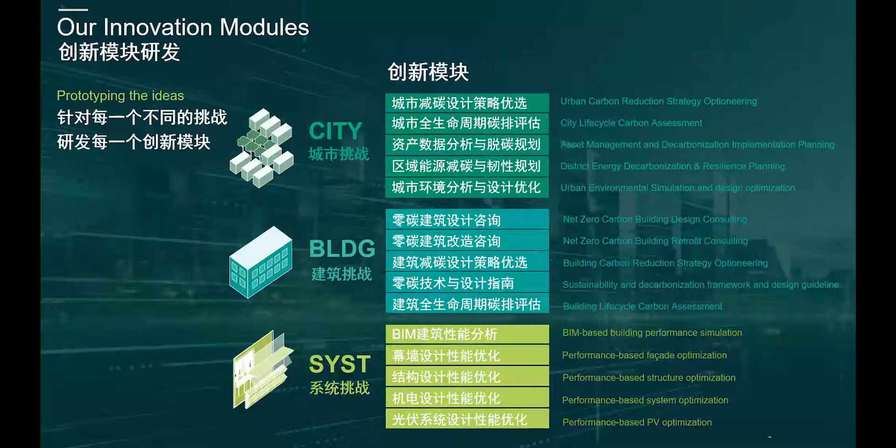So the way we work is with clients, and clients for us are internal clients, internal practices, but they're also external clients. We work through ideation and research to develop what we think will be an innovation. We test it and optimize it to see how well it will perform. And ultimately, we customize it project by project.

And this customization is really important because that's more like the design process. You don't do the exact same process for different buildings, right? You change your process, you change your result. Therefore, we think the technology layer also needs to change to adapt to be more precise. So if you buy a piece of software, it kind of gives you the same result, you just have to use it differently. We change the software by project, and that's a little bit of a different approach. And then in the center column, you'll see the iLab tags, those are all of the different modules, and there are modules within modules there that take on all of those different scales.

All right, so in section 2 here, we're going to go through some of these projects.

As I mentioned, the critical piece for us is that we're testing these on real projects to show their value. While in many cases what we're doing is relatively new, all of these workflows and technology layers I'll show are no more than 3.5 years old. They go back farther in terms of ideas, but we've really been developing them within the last 3.5 years, in some cases the last 6 months or less. But we test them out on a range of clients, scales, and asset types.

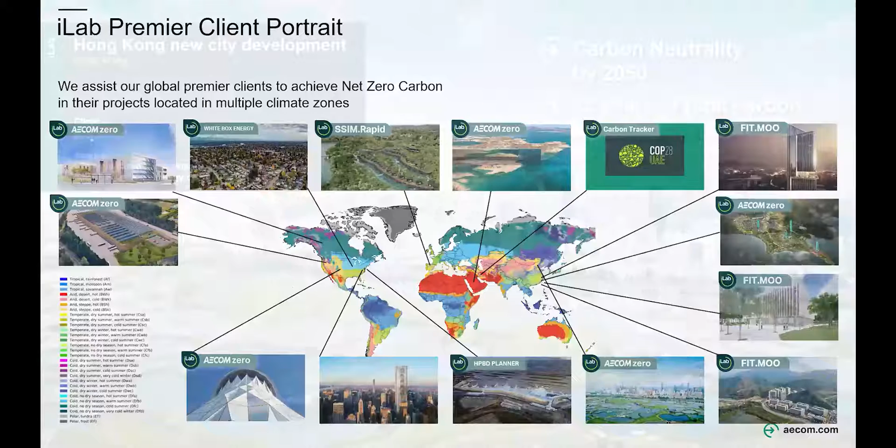So the first one, we'll start at the city scale. This is the Hong Kong new city development. What we were looking at is life cycle carbon assessment and doing a decarbonization strategy. Ultimately, they have to achieve the goals of the project to achieve carbon neutrality by 2050, and 25 years of total carbon emissions projected to be reduced by 50%.

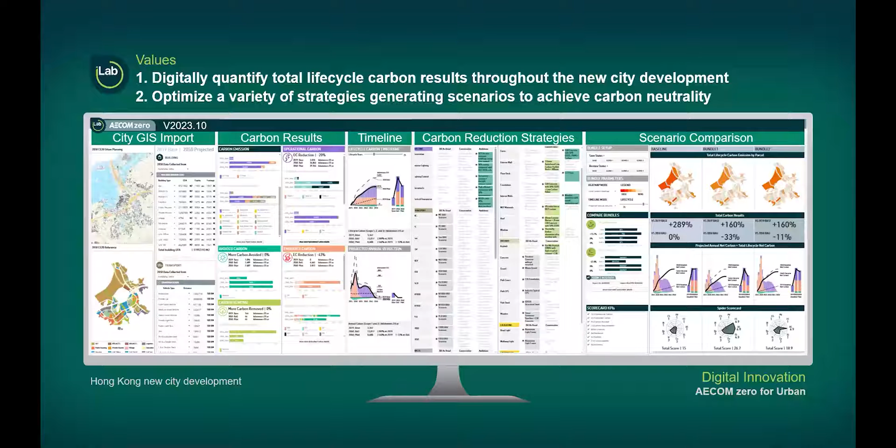Time is a critical factor for influencing success. We need to make change fast, and if we can make better decisions faster, that's key. This may change with robotic construction, but for the moment it's difficult to shorten the construction phase, though it's much easier to shorten the design phase. But how do you shorten the design phase while doing a better job rather than a worse one? That's the challenge, and that's where this good, better, best approach comes in.

As you select these pieces, the carbon begins to move as well, and it works in real time, that fast. So we can individually select using our intuition and knowledge as disciplinarians, or we can automate that and run thousands of selections of bundles.

What that allows us to do is create scenarios and track them, the graph you see there, about where we think over time, in this case out to 2050, we'll be if we do nothing and don't change from business as usual, versus different selections of bundles that let us create performance profiles, in this case at the city scale.

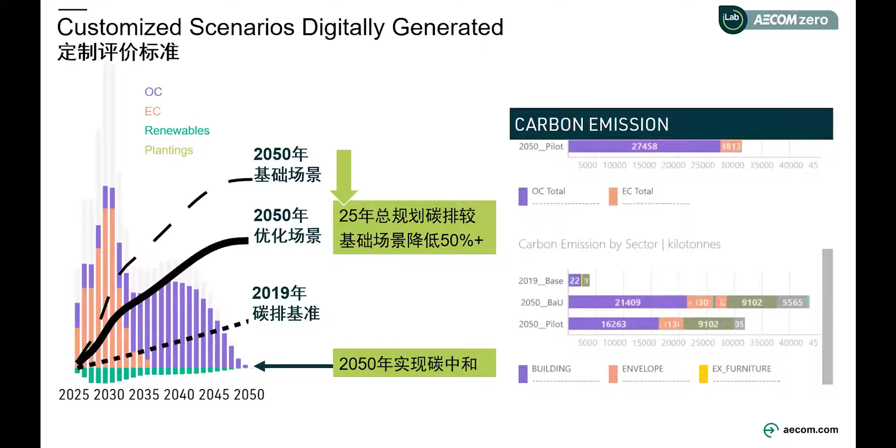The idea of multi-objective optimization is really critical when you have potentially thousands of variables, and those combinations end up in the millions.

We need to get below this threshold, and we end up with far fewer selections. If you had to try all of those out, how long would it take you to figure out how long it would take to get to B? And you're not sure where you're starting. That's the voyage we're going on. We're not sure where we'll end up, but we know where we're going. We understand the criteria. We need tools to help us get there faster.

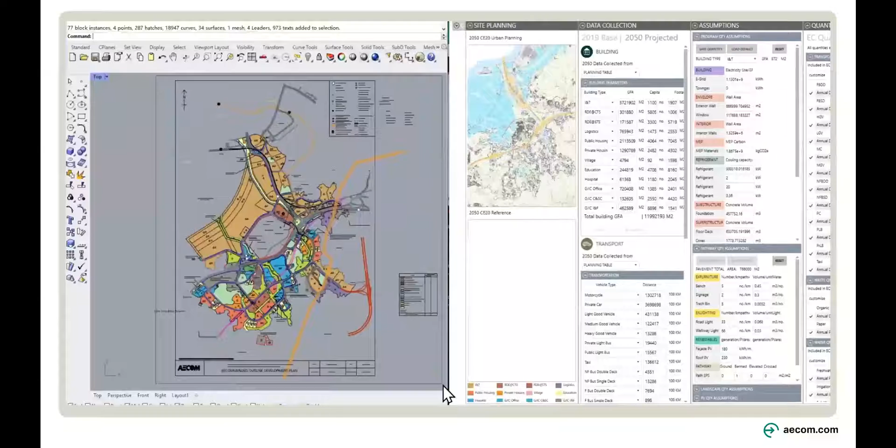We can start by selecting the parcels. They're loaded in.

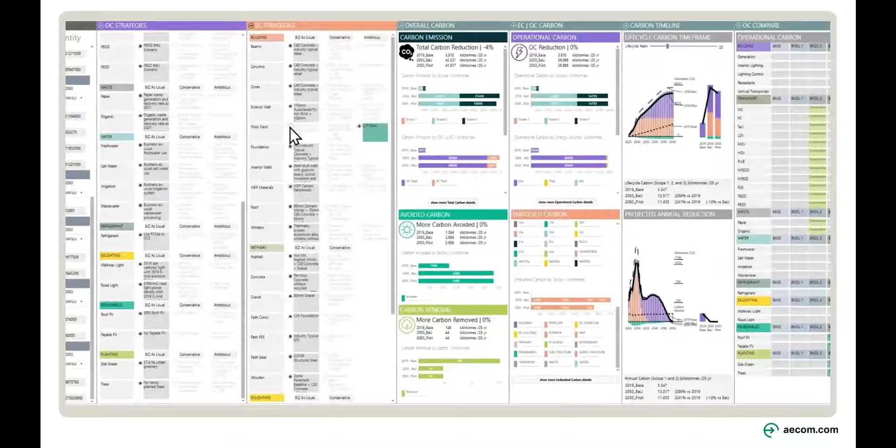We start with assumptions, as much information as we can gather that's available, and then we assume the rest. There are quantities, then operational carbon strategies, again measured against baseline, conservative, and ambitious, or good, better, best, business as usual. So you have operational carbon and embodied carbon.

Then we can see, as you make those selections, the different bundles, and this happens in near real time.

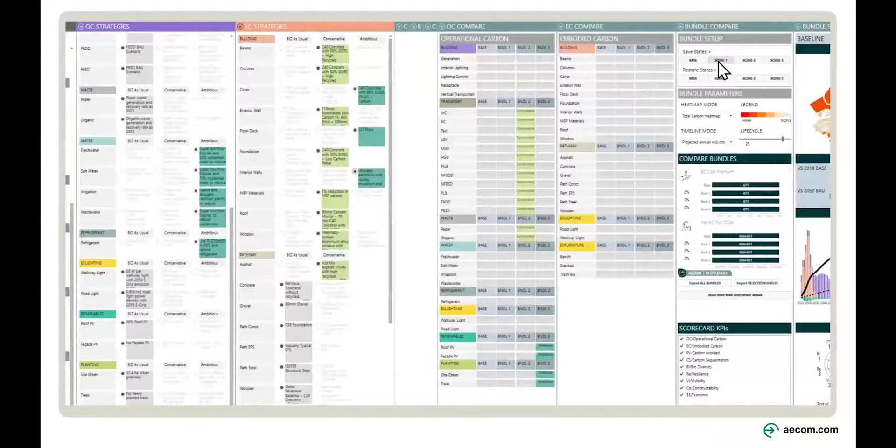What's really engaging about this is that we used to get a directive from a client, then go back to our desks and work, talk to three different disciplines, talk to some more, and do additional research. Now we do pre-work ahead of time and then sit together with the client and do this together.

Where do you want to go? Ultimately, you can see there are a series of bundled selections on the right, and we can choose how much carbon is necessary for us to reduce. Ultimately, what might be the cost of that? What are the stops along the way?

Down at the bottom, you can see the kind of scorecard against the things that the stakeholders care about, it's really not a client when you're dealing with a city, it's stakeholders. What do the stakeholders care about?

So there's a pattern that comes out, and we can begin to quickly assess which is the right pattern for those stakeholders, and then of course there's very quantitative data.

We've also found that stakeholders read things very differently, so communicating these ideas is really important. Some stakeholders read numbers, some read graphs, some read patterns, some listen to words. So our approach is to show them all, and that gives you the total picture of how you understand the information flow giving you the results.

So this is an example, at that huge master planning land use scale, of what we do all the way through.

Yeah, better go back to that. Okay, so that was the city scale. Now we'll zoom into the district scale.

Before we were looking at land use information. Now we're going to be looking at building envelope information. This project is called The Point, a district in Utah. It was designed by Skidmore, Owings & Merrill, but they had a very difficult challenge: to meet or exceed 50% carbon reduction, including other KPIs we'll discuss, but no more than 5% total increase of cost over business as usual.

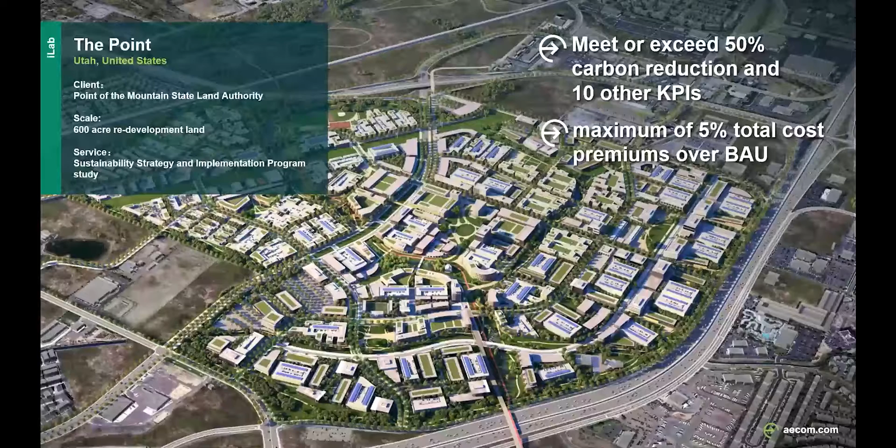So very little cost increase, but a lot of carbon reduction. We were engaged with this process we call Sustainable Systems Integration Method, SSIM.Rapid. It's now cloud-based. What they care about here is carbon, waste, energy, smart capability, integration, water, and vehicle miles traveled. All of those help with the sustainability, usability and livability of the district, and those set the targets by which we want to measure the decisions we make.

So we have the model and a plan, the urban systems we care about, and that baseline good, better, best scenarios. We do iterative optimization and get alternatives. From those alternatives, we can engage in the sustainable systems model, which I'm going to show in a minute, and then smart city technologies that can help augment that. And then ultimately that results in your key performance indicators and the cost of those key performance indicators, so that can be capital planned into the development of the district.

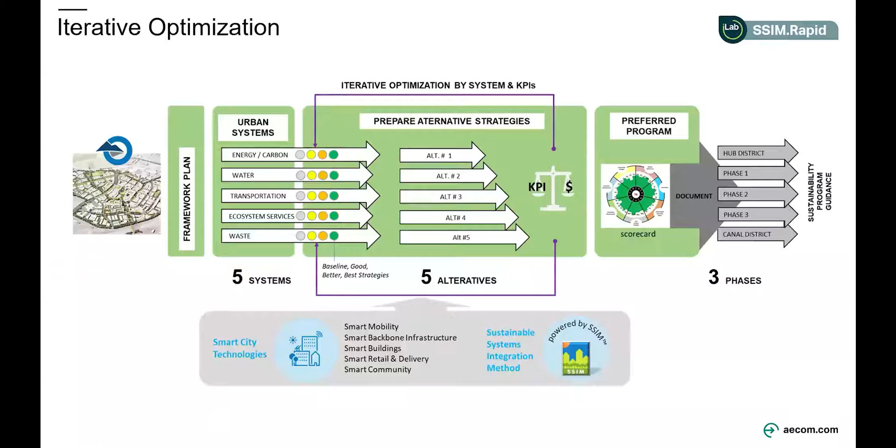Not understanding how to spend your money is another huge time delay in the productivity of the built environment. If we understand the capital flow over time, we can make decisions and start work sooner. And ultimately, that should give us choices on what is the program that we should put in place to maximize those stakeholder values.

So starting from the digital twin, which you probably hear a lot of these days, we're starting to call it the living master plan, because digital is not something extra now, right? It's all digital, and we want it to be living, and it changes over time. So the a priori condition is where we start, and then as it develops, that continually feeds the model. That's why I consider it living and digital at the same time.

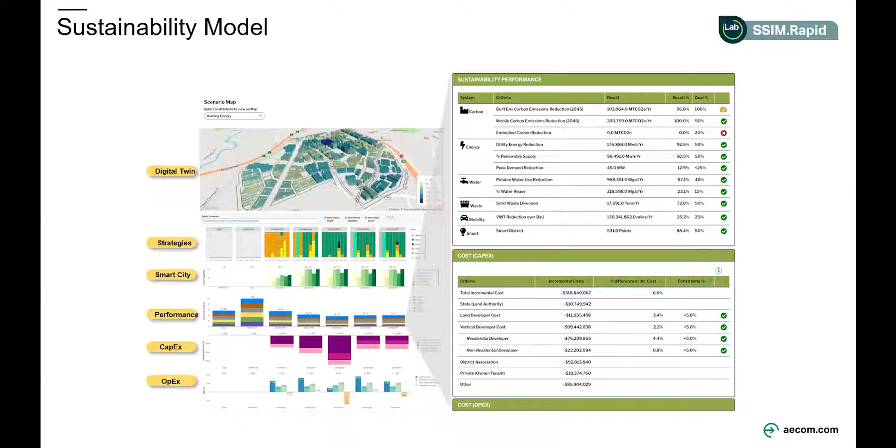We get the strategy selections, integrating in with smart city opportunities. The outcome of that is the performance metrics by sector, and then the division of capital expense and operational expense over time. You can kind of see a blow up there of those different criteria. The key part that's valuable to the stakeholders is they've set the goals, we now have results, and we can checklist against it very quickly. So we can say, with all of those different variables, how are we meeting the goal of the project?

And in the blow up there, you can see we can break down the baseline reference, here's to meet goals, and ultimately, how far can we go? How much lower can we go in terms of reduction in carbon? But what are those cost impacts over time?

And really importantly, when you're dealing with district and city scale, is where does the CapEx come from? Where does the money come from? It doesn't come from one place when you're developing a district, it comes from multiple sources. So to be able to understand who has to fund how much in the early stages of design is really critical for setting up the funding strategy for the development.

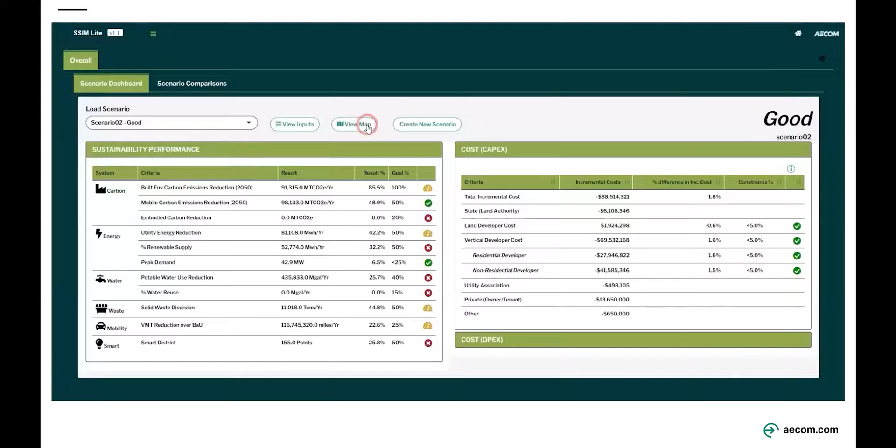And it looks something like this. So you can select here, scenario 02. We're loading the scenario, we have the model. Each of the parcels or building models there contains data. So we'll go to the 2D, and as you select it, you get the data that's built in. In this case, the expected energy use of that type.

Now we're looking at water, sustainability performance overall, and so that becomes the selection. Now we're changing from good, better, best. Good, better, best is defined very technically in a spreadsheet that's behind there. So it's not just a percentage, it's actually something that's articulated and modeled.

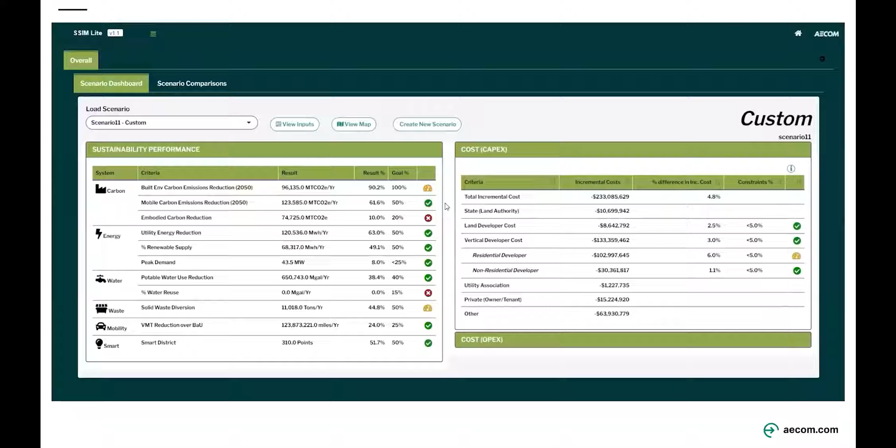That was building energy, photovoltaics, public realm, street pathway lighting, for example. Move over to smart systems integration by the percentage of fully integrated or partially integrated systems. Electric vehicle adoption, smart parking, all of the components that make up the district become part of the model. Waste, and then it calculates, and we find out how we are tracking against the original target.

So we move into another scale and a slightly different type of project. In this case, we're looking at single family homes in the state of Washington. We were engaged to help them create a plan for 95% carbon reduction for 3 million households across the state.

To model those individually would be really difficult. If we calculate it manually, it was something like 64 models we could do. But when we did it numerically, we could do 180,000 simulations in the same time, so we get a much higher level of resolution by bundling and modeling. We're fetching data from publicly available resources on the systems, engaging that and extrapolating to the home types that are available.

What we understand already is with these system selections, none of them are meeting that criteria by the 2050 goal. Many of them can meet the 2030 goal of a certain amount of reduction, but none of them alone will help you get to the 2050 goal that's really required, except for these systems here. So immediately we can understand what systems you need to move to in your building.

The good news is most of these systems are already under the line for 2030, so they don't have a 2030 problem in the state of Washington. They have a 2050 problem. And because they know they don't have a 2030 problem, they don't have to work on that. They can immediately start working and buy themselves extra years to work on the 2050 problem, because those systems are harder to institute. They're more sophisticated, not as readily available, so they need more lead time to get there.

In this case, we're training a model using machine learning from the publicly available records. What you just saw was the dashboard. We get the modeling results, and future developments learn from the database. So the new developments are being planned based on the data they're getting, and that data feeds back into the new records, so it continually refines itself, ultimately machine learning over time on the way to 2050.

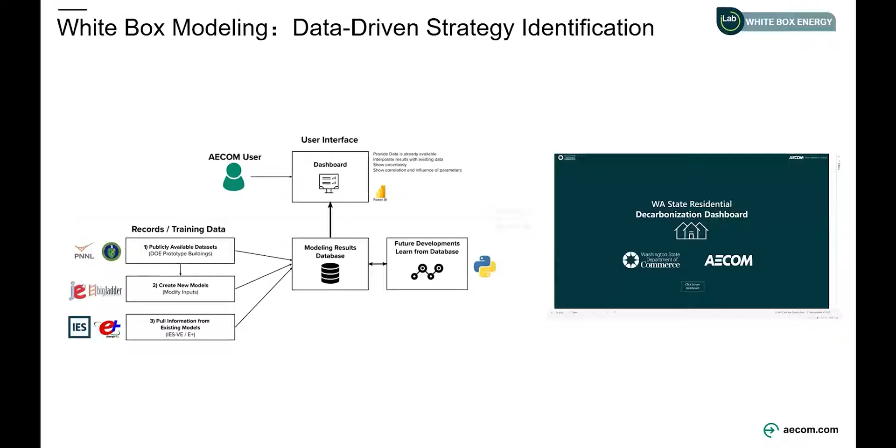So you can see here how far we can get from our model. By 2030, we've got 65%, and by 2050, we can get 96%, based on the results of those 180,000 simulations we've got. It was 64 models from the original approach as designed, and then we came in, developed this process, and got over 180,000 models that allowed us to get to those results faster.

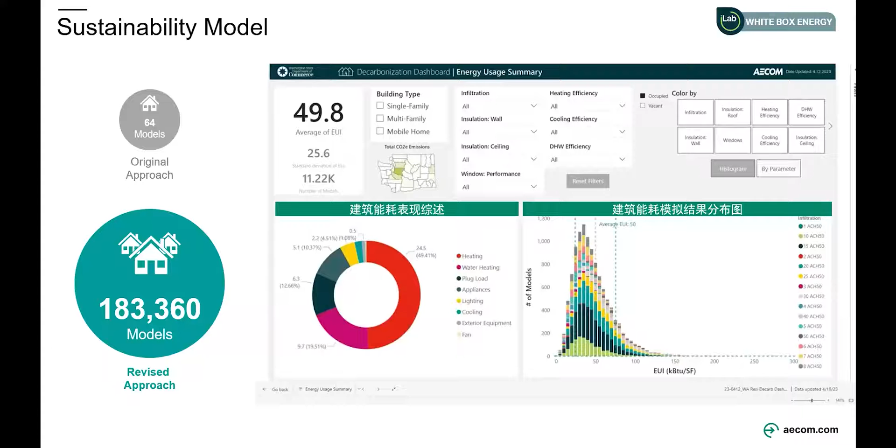So a little bit of detail here, for example. You'll notice that whatever is meeting the goal on the right-hand side for 2050 is always electrified. So electrification is the future for buildings - there's no way around it. And now that we know that, it's clear in the model that you cannot get to the target reduction goals unless you electrify. We can start working towards that immediately.

In our cities and our infrastructures - and in the United States this is critical, because the electrical infrastructure is not ready for an electrified built environment, which means that if you start electrifying all your homes, your infrastructure will fail. So what does that tell us? Don't focus on the homes yet, because 2030 is fine. Focus on the grid, because the grid is not ready to handle the load.

So we'll zoom into the building scale. This is the National Renewable Energy Laboratory EMAPS building, a research building for energy storage.

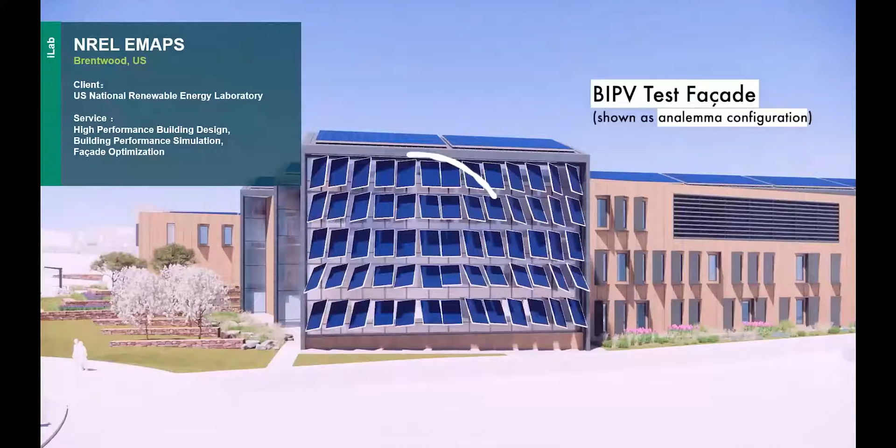This was a competition done with a contractor. It was design-build, so we worked for the contractor, and our role at iLab was to be the integrator. Often when we're engaged in building projects, we sit between the contractor, the architecture designer, and the engineer, and we ourselves have different disciplines. Architecture is central, but we have a bunch of different disciplines in our group. Our job is to know enough about all the different discipline languages that we can pull them together and bring that collective knowledge up front into the model.

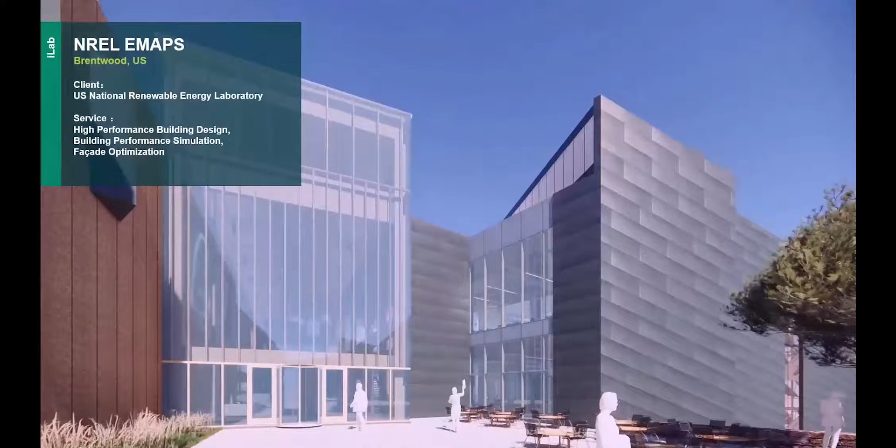You kind of see the building here. The types of challenges you face is it has to be a very high performing building with the potential to be net zero carbon - net zero carbon capable. But to build the building, you have to really build the majority of it out of concrete, because it's the cheapest material to meet the requirements of cost, which was a set cost. So you're seeing here an atrium done in mass timber, but it's the place that you enter before you go into the concrete buildings on either side, to help discuss what the building is trying to achieve.

Of course, the architect wants an all-wood building or a fabulous facade - sometimes they don't care what the facade is as long as it's expensive. The contractor wants it as cheap as possible. And what we're trying to do is help them find the balance between the two.

We often try to get some free support, meaning massing and orientation, which computationally allows us to make choices that don't cost anything. So we want to do that first. This technique has been around for a while but isn't used often in many offices. We think you really can't manage the cost and increase performance on a project of this complexity without doing this kind of modeling.

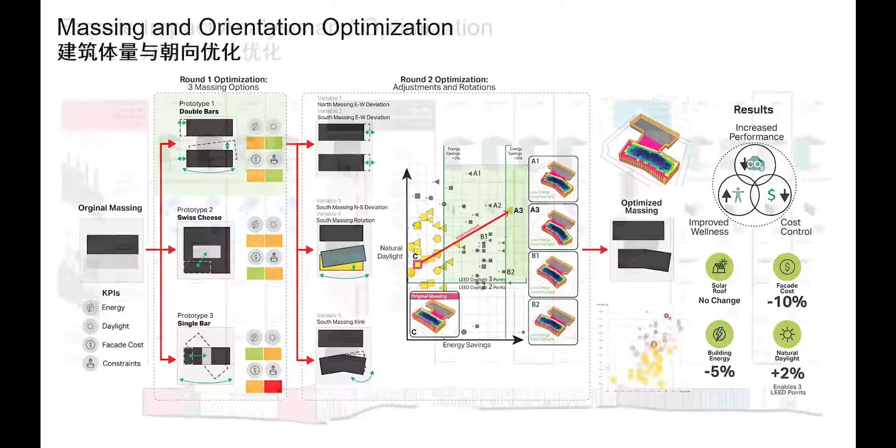So we're starting off towards zero without costing anything. And the facade plays a large role in this. I'm sure 50% of the energy in a building like this is gained or lost at the facade. So the performance of the facade really matters.

I look at the facade as an extension of the mechanical system. When I show my research in the next section, you'll see it is essentially a mechanical system. So the challenge again is using the facade impact tool, we're zooming into this scale where we can look at cost, daylighting, and energy together with specific assemblies. How do we choose that right assembly?

In this case, a typical sandwich panel would be a certain width of concrete, then insulation, then more concrete, and then framing with insulation so you can put things around it. Together that makes a performing enough, but very carbon intensive wall section, and the cost is cheap because it's mostly concrete and insulation.

With our analysis, we found that by adding 1 inch of insulation and changing the type of available insulation, we could remove the inside framing and the inside insulation, so it was just concrete on both sides. That performed equally as well, and you got the added benefit of thermal mass on the inside to stabilize the temperature, giving you effectively a radiant passive mass throughout the entire building.

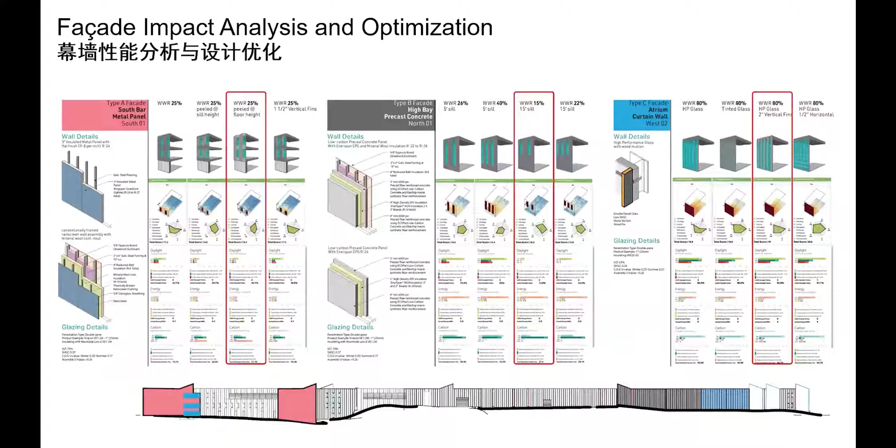What we find often is they're the ones who hold the note on the project. They're accountable to the client for spending the money, so they like the cost certainty—that's really important to them. If we can meet the sustainability criteria with their cost certainty early in a project, they're happy to do other things. Oh, you save me money here, go make a lobby out of beautiful wood, you can go spend it there. That's the kind of exchange we sit in the center of when we work this way.

We use the same approach trying to equalize the daylighting. There are many daylighting analysis tools. For me, I've always worked towards finding the lowest contrast across any particular space, which is most comfortable from a well-being perspective and increases the productivity of people in the room. So we're looking to reduce hot spots and dark spots. Oddly enough, it could be all dark or all light, and that's better than dark and light at the same time. We're looking to create evenness.

In this case, we tried out multiple roof types until we arrived at a combination of 2 clerestories in the lobby, plus a reflective panel that brings light deeper into the floor plate, reducing that contrast ratio across the entry space.

Just to take you through the process we went through with the design team and contractors: we can geolocate the building and select the criteria by which we're creating the code. In this case, it's the building code of 2021 and ASHRAE 2019. You see, we can adjust the massing and the structure.

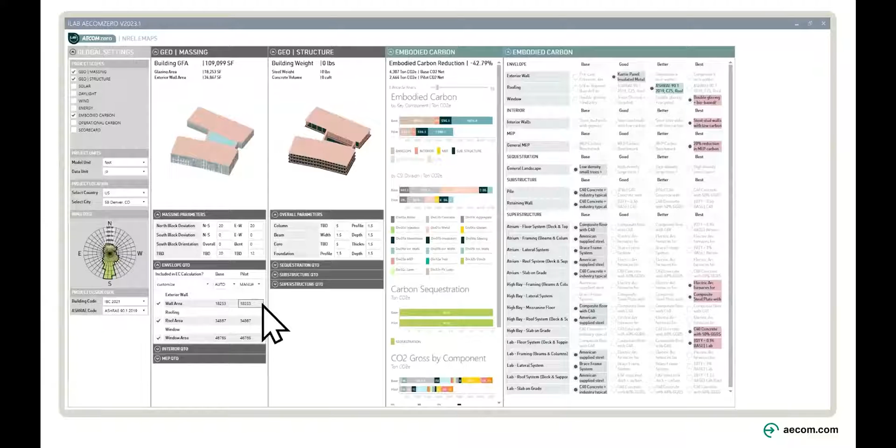What the wall area is, we can do window wall ratio. Up there on the upper left is selecting the modules that we look at. And then good, better, best, looking at, in this case, operational carbon. It already went through the embodied carbon. You can see as you make those selections in real time, because these are pre-engineered, we know the system, it's already been modeled and linked here through a database.

It's important to note that we see this as a design tool and not a carbon tool. Carbon is the measure of efficiency. Ultimately, how good your design is, how low your carbon is, how well does it perform? That should be the test of how good a design it is.

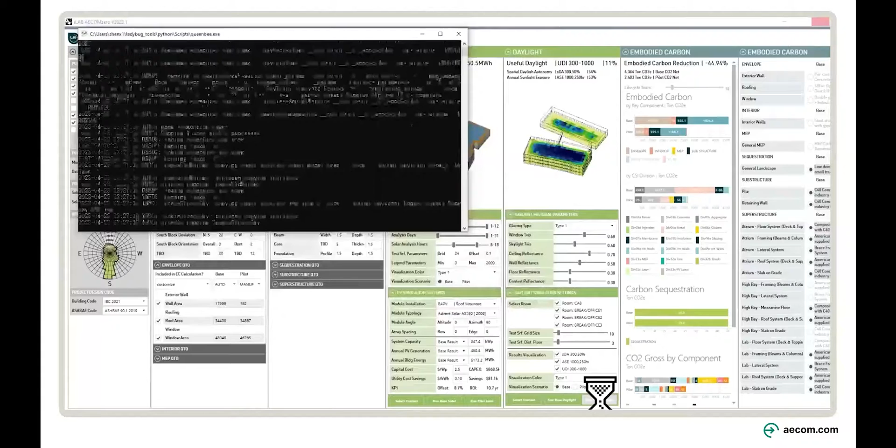Carbon isn't necessarily the only goal. It's also daylighting and usability and views. And so we like to bring those things in there as well, both quantitative and qualitative aspects. We can model the scenarios between the baseline and the individual pilots of those different selections, so we can see how is one improved over the other and what the relative costs are.

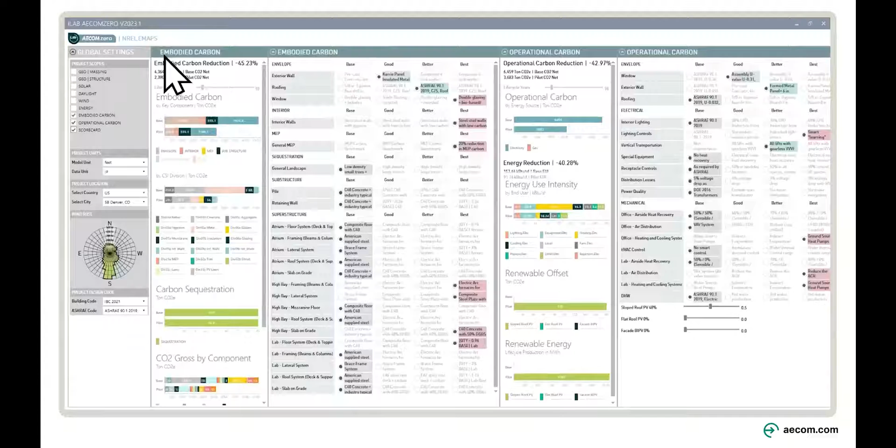We can select the key performance indicators, what the stakeholders care about. In this case, you're looking both at the end use client of NREL, but also at the contractor, since we actually work for the contractor. And you can see the different ways in which we can adjust. We go all the way for best, you can start seeing the shape change. So you kind of get a pattern recognition ultimately of how well is this performing.

Now we're going to zoom in one more time to the system scale. This is a project that we worked on two years ago, where we were developing what we called the facade impact tool, multi-objective optimization. So FIT.MOO.

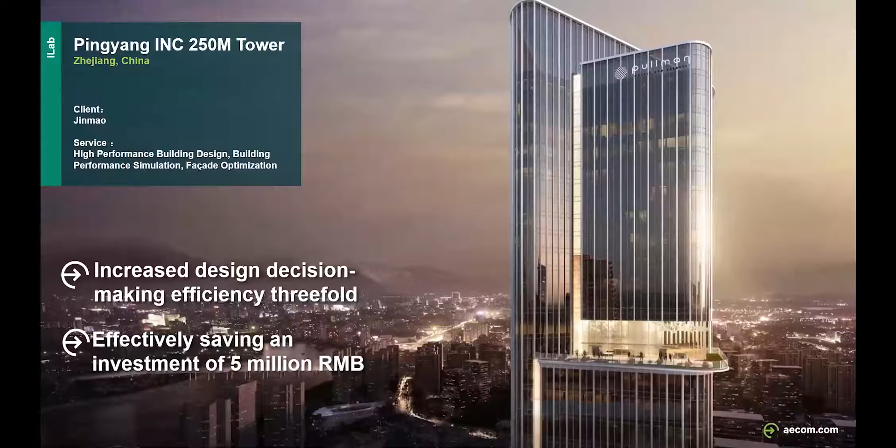The goal is to increase efficiency and try to manage the cost at the same time. So in a similar way, looking at the fenestration, shading, the wall assembly, the outputs of daylight, energy, cost, carbon in a series of the baseline as designed, and then scenario 1, 2, and 3.

Which can be done both manually based on our intuition. Often, if you've been doing this for as long as I have, sometimes you kind of know what the pattern is, right? But you don't always have me in the room. So you need to be able to provide numerical ways to get there.

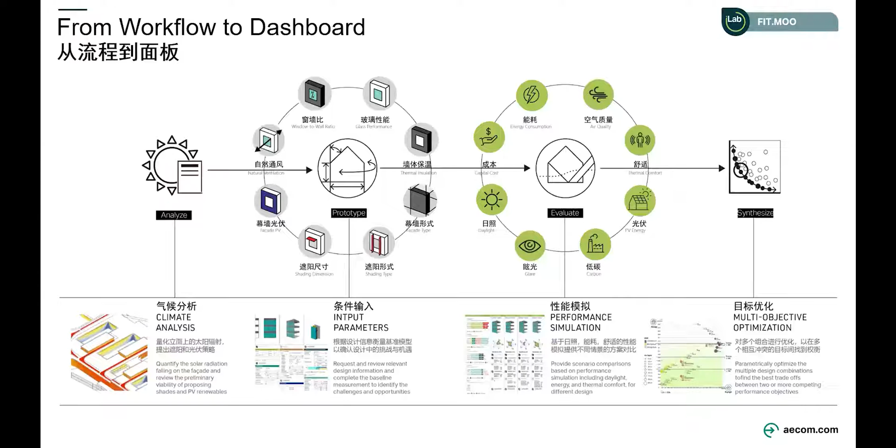So our criteria here link together climate analysis, input parameters for the facade, the performance simulation, which is really two parts of the dashboard, and ultimately the multi-objective optimization will help yield the results in those two frameworks. And then you'll see side by side the facade optimization, the facade impact tool on the right, and the multi-objective optimization dashboard on the left.

Other way around. So on the left, you're looking at the impact tool, which is looking at the facade selected in the built context, brought into the bay scale. You can look at different orientations to very specific wall assemblies as part of that.

Each of those, because it's a discrete assembly, it's easy to cost. And that cost can be from information we already have, or it can come directly from the market, from the manufacturer.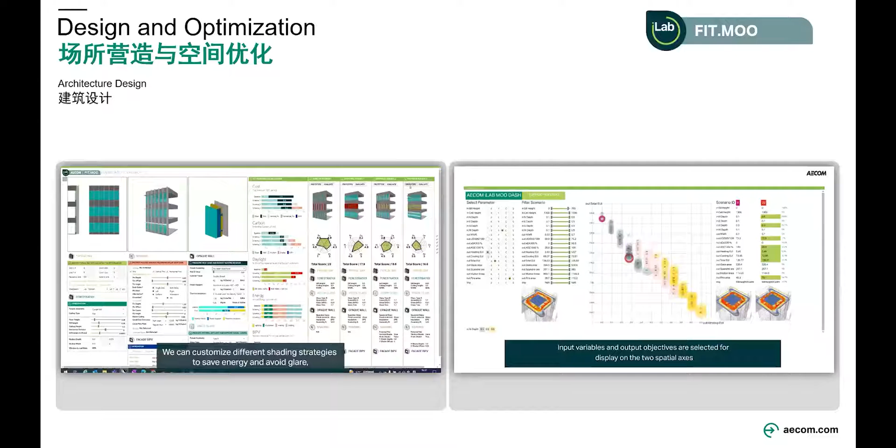And on the right, we're looking at running thousands upon thousands of scenarios of the window wall ratio and the makeup of those performance aspects of that assembly, so that we can see which one of those makes a difference when you move the sliders around to say which part of the performance of that assembly is critical, and then how does that impact energy and daylighting.

And then ultimately the results are that by deploying the facade, we have three types there on the right-hand side over there. You deploy those strategically based on the profile loads of the building. And we can, with a little bit difference in carbon, so the carbon increases a little bit, but a significant decrease in cost. So we think that's valuable because, again, it helps us.

We can put more money to use towards something else. Maybe for that money, we can put a much more efficient mechanical system in the building, for example. So that's the kind of trade-off we're trying to get to, deploying those facades strategically, understanding what people care about. Everybody cares about cost. And again, carbon as the indicator. In this case, it's the lever that helps us make those choices.

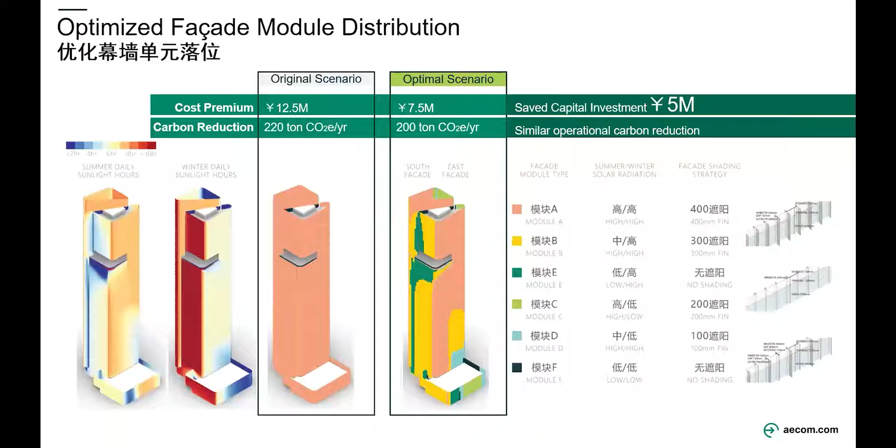We began to think about it this way. This is a project we worked on in New York City. A client came to us and said, make us the best building in New York.

I don't know what it means to make the best building in New York. There are a lot of buildings, a lot of great buildings. But the criteria we chose were energy, photovoltaics, and view shed, because in New York, the real critical aspect is what you're looking at. That's the largest economic driver of the ability to sell or lease your space.

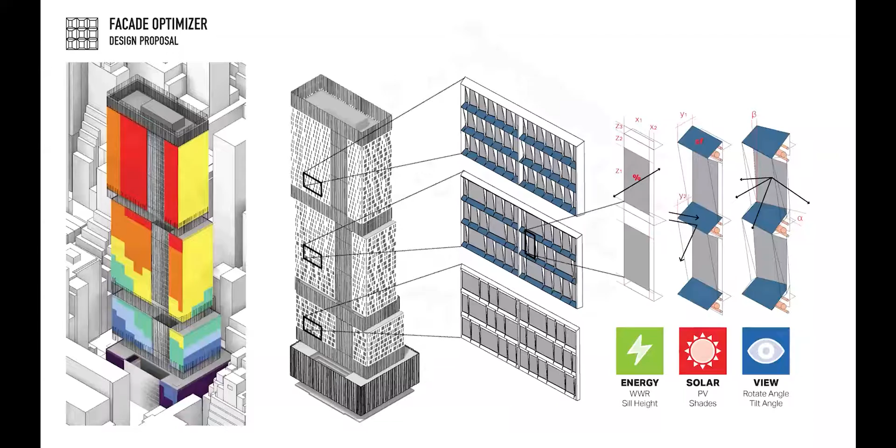So to maximize all of those things together, we created a suite of banks of windows. I think there were 5 different types of banks. We were detailing 3, and they were deployed strategically around the building based on the criteria you could see.

And then ultimately it looks something like this, which is really the expression, everything in the kitchen sink. This is every system you could possibly throw at a facade, we threw at it. We don't necessarily think that's realistic for most projects, if any, but we wanted to showcase what they could do if they wanted to address all of those criteria at once, and ultimately allow that facade, as a performance facade, to have an aesthetic that can brand the building and brand the company as they started to build more buildings.

They're a Dutch company that wanted to do work in the US, and therefore the branding of who they were as a wellness and sustainability company that allowed them to get higher lease rates was absolutely critical. So the facade performing, reflecting that performance, becomes that advertisement.

I don't know if that's the best building in New York, but it's not a bad building in New York. And it does have something reflective about the city in the way it's performing. So there's an aesthetic you can come to from the outside that you don't even need to know what it is, but it's specific to something. And I think that's meaningful, rather than composition.

And then, okay, finally a built project. This is a project we started working on in 2017, a STEM building, science, technology, engineering, and math, for a community college, Suffolk County Community College. They wanted net zero energy, they needed cost control, and there was a very limited, almost unrealistically low budget, and it had to be a legacy design building. That's very difficult to get all of those three things at the same time.

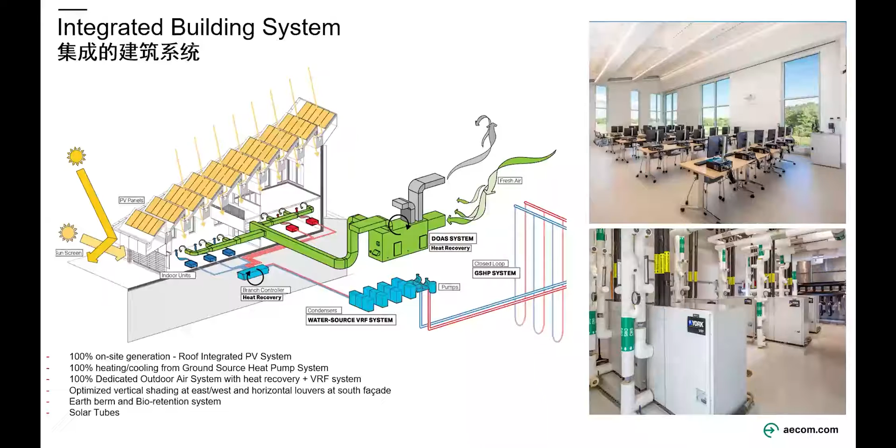And to help us tune the envelope, we used similar computational techniques. In this case, we can run a suite of protocols to help us understand the solar shading on the south side, which we've already reduced exposure to because of the angle. We want light in, but we need to control that light because every ounce of space is valuable due to limited cost, so each space is used. In this case, classroom or lecture space, even on that south side, has to be used for something functional, so we need to control the light. This allows us to precisely articulate that facade to the purpose of the building in the environment it's in.

And here we're doing the same thing with the windows on the east and west sides. Where should the vertical shading go, and the pattern of the windows, so that we can create the most even quality of light in the room where they're going to be working?

That is challenging because you're working on screens. They're teaching cybersecurity here, so they're all looking at screens, but there's a lot of light. You can imagine the glare that could happen on the screens if you don't get this right.

So this is a critical aspect of finding out the right pattern of those individual components, using the same technique we did for major parcels of land in the first project that we showed. The workflow and thinking is not different, but the scale is different.

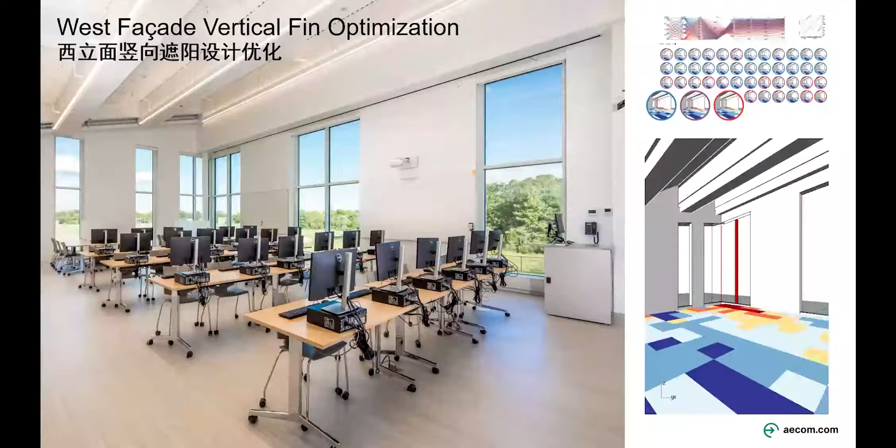So we're going to shift pretty radically for this next section. There are a lot of slides here. Some of these I'm going to go through pretty quickly.

This is work that I did during my PhD at Delft, which was... I've worked in architectural ceramics ever since undergraduate. So I've been focused on the value of how you can use ceramics, initially through aesthetics and longevity, but ultimately I came to understand the value of articulating a mass with a certain shape, such that the fluid dynamics around that mass can play a very important part in the energetic nature of the facade, where the facade does become a significant augmentation to the mechanical system of the building.

There is enormous amounts of energy that flow around the facade. It's very low-grade energy, and typically you wouldn't use it—you'd want to get rid of it. But in this case, we want to use that building facade as an energy transfer function. The trick is you often don't need the energy at the same time it's available, so that function has to have a time delay in it.

With regular passive mass, it's very difficult to control that time delay, so we need to have active mass, and I'll talk about what that is from my perspective. The main part you're missing there is the catchphrase where it starts, which is called climate camouflage. The goal is to use the building facade to camouflage the building from the energetic forces of the environment and make it feel like it's not there.

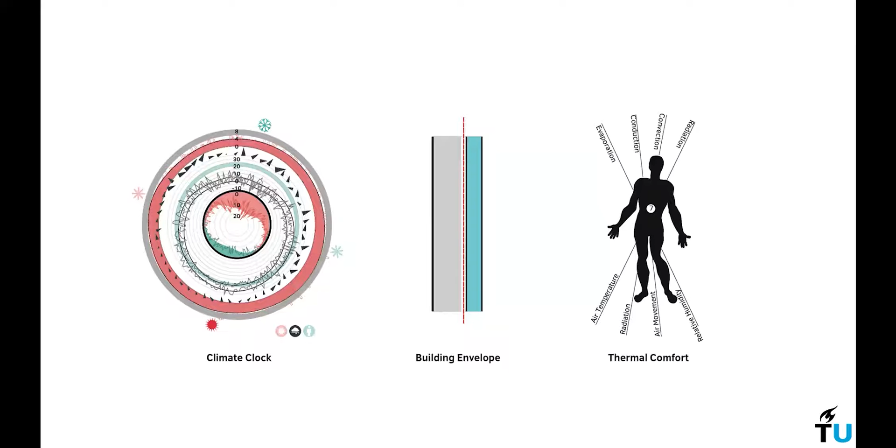So if we look at—if I can hide this thing at the top. Do you know how to hide that out of the way? Yeah.

Broadly speaking, you have layered assemblies of building envelopes and mono assemblies of building envelopes. They evolved into combined systems like rain screen walls, thermal mass sandwich panels, and insulated concrete formwork walls, coming from combinations of mono and layered assemblies.

Where I'm interested in is the integrated or polyvalent wall, where you have both active and adaptive. What I'm focusing on is the adaptive facade, the ability for energy to move back and forth through the envelope in a controllable way.

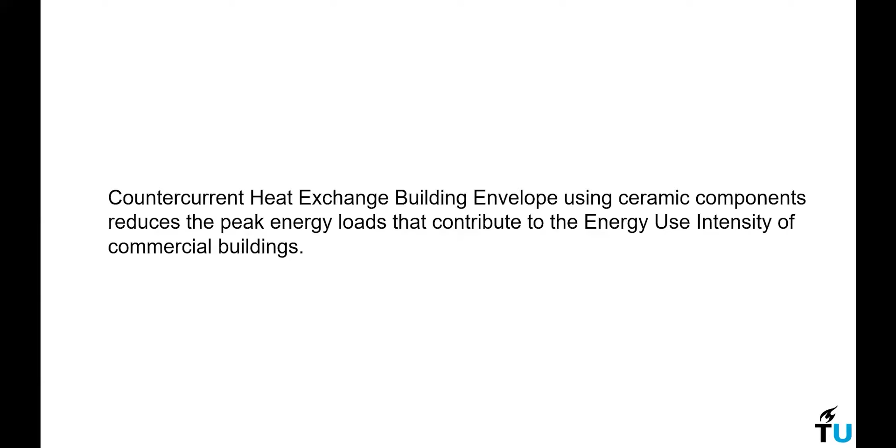The driving statement is: countercurrent heat exchange building envelope using ceramic components reduces the peak energy loads that contribute to energy use intensity of commercial buildings. And as a question: what is the energy use intensity reduction potential of the thermal adaptive ceramic envelope system using ceramic components for commercial office projects?

I had the opportunity to teach in a PhD program for many years before I did my own PhD, and I learned this maybe too late in my teaching career: asking the right question is the most important thing you can do. If you don't get your question right, you're going to have a very difficult time. I spent a lot of time refining that particular question until it was a very narrow band, and yet this is still ultimately a design project.

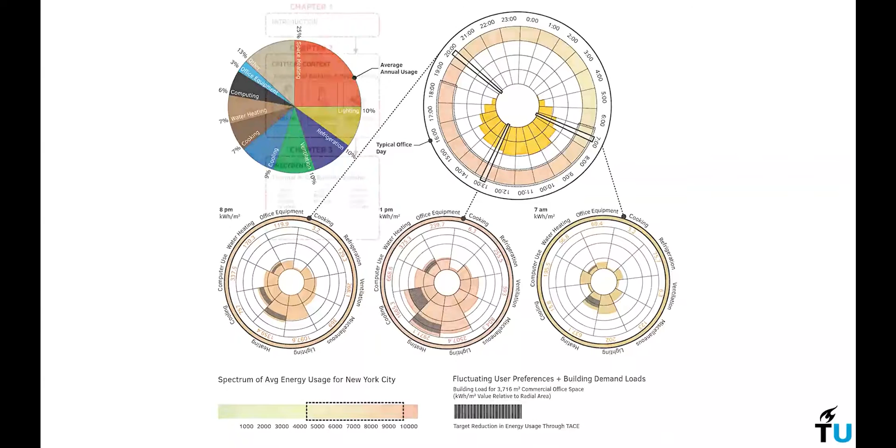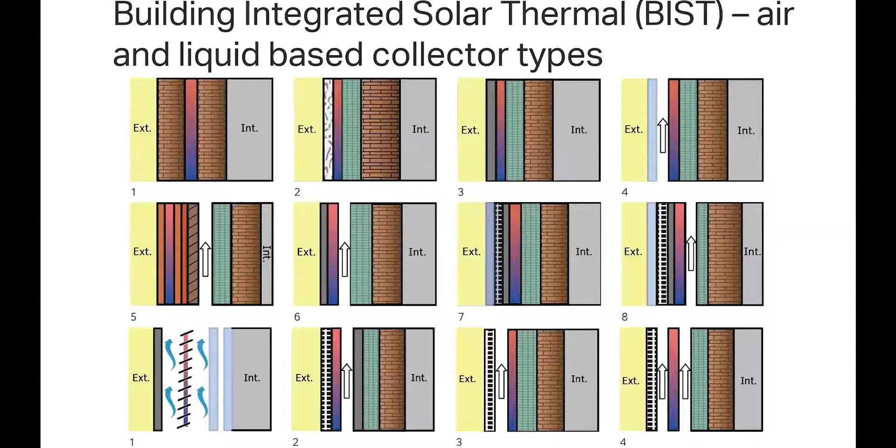This is the same thing but liquid-based—air and liquid-based collector types, where you're collecting that energy, all in an attempt to do the same thing I'm talking about. I'm not inventing the concept; I'm trying to use very specific components of it to augment an idea that's already been around since Roman times—the hypocaust, where you heat the floor of the building and the exhaust goes up around the walls, which is not so dissimilar to what we're looking at here. It's an idea thousands of years old in practice.

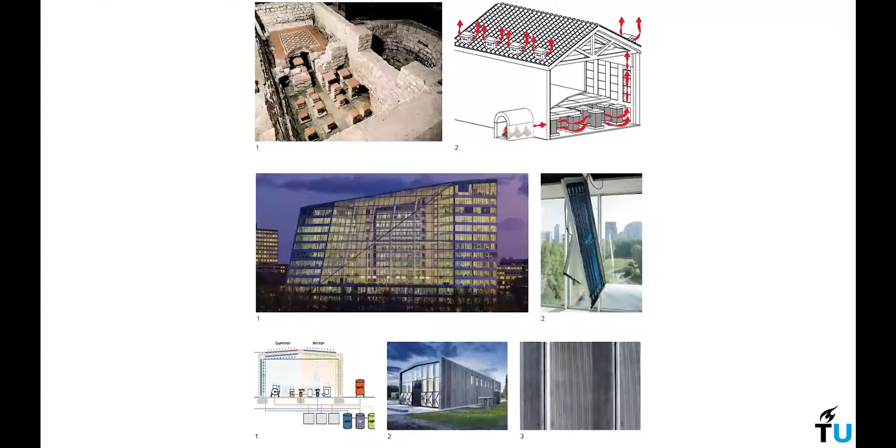Below is a demonstration factory at the University of Darmstadt, where they do something similar, with pipes embedded in concrete panels. Those pipes go to collectors, then to seasonal storage, and are pumped back out. It's primarily a net zero energy, fluid-embedded factory building that holds its temperature over the course of the year, and it's actually quite comfortable inside. So there are precedents for this as well.

So what I was interested in is doing this out of ceramics, and ultimately looking at very particular parts of what's happening in a building facade.

So the functional aspects are conduction, convection, capacitive storage, mass energy transfer, radiation, refraction, reflection, and human thermal comfort. Those are the equations driving what's happening in that building facade navigating the outside climate and thermal comfort. That's a lot that's going on there.

The parts noted in red are the variables I'm trying to control to create more capture or more release or time delay, and create a ceramic component of the facade that is able to harvest all of those things.

So here is conceptually how a ceramic tile has a large dimension to it from the building, and how you begin to articulate those different components to maximize those variables. Should it be more of it or less?

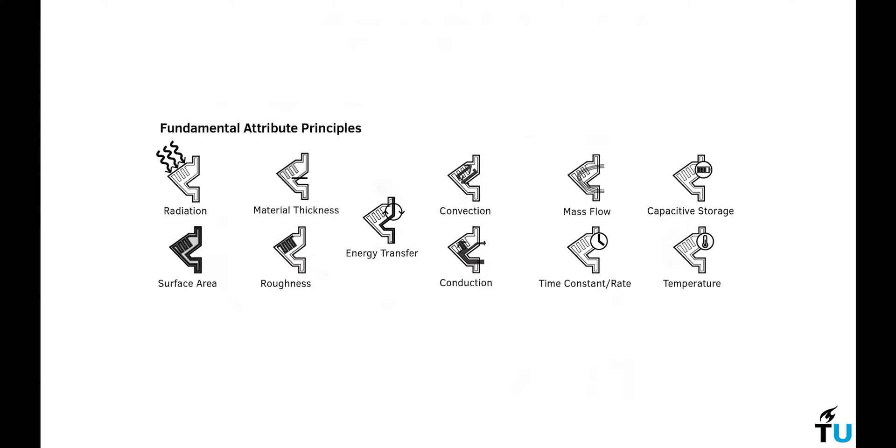You could look at it like this: material thickness has to do with capacitive storage and conduction. The color has to do with radiation and reflection. Texture has to do with convection, roughness, and surface area. Remember, there's an equation for each one of those, and they all have to function together.

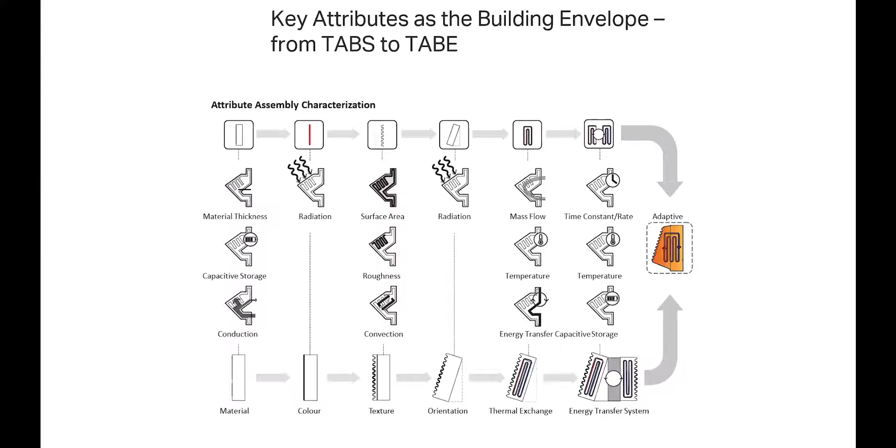The orientation has to do with radiation. Thermal exchange is energy transfer, temperature, and mass flow. Energy transfer as a system, when you assemble them all together, is capacitive storage, temperature, and the time constant or flow rate, ultimately creating an adaptive ceramic module that takes advantage of those energy flows in and out of the building.

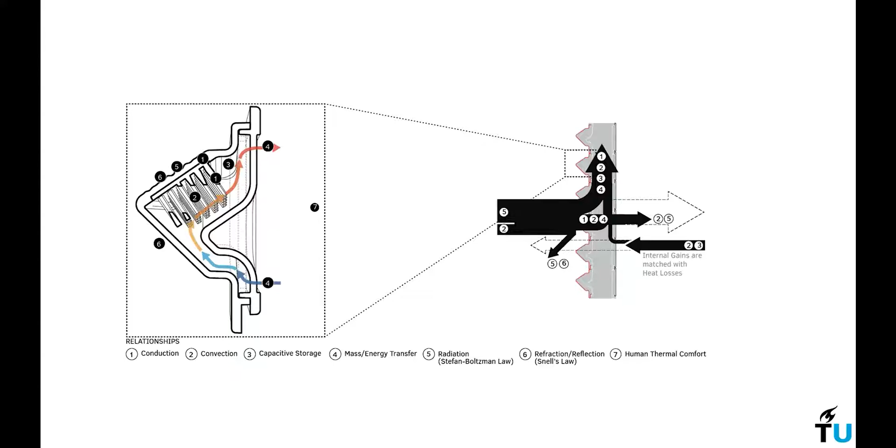In section, it looks something like this. There's a module here. The numbers correspond to the functional what's happening. There's a fluid inlet in a hollow tile. There's an articulated surface area that helps control the exchange, maximizing the exchange of that energy on the inside and the outside. So fluid comes in cold, exits hot.

And it can go vice versa in reverse. So we built it using the digital fabrication lab. We built molds with those articulated surfaces meant to manage the capture and then transfer of that energy.

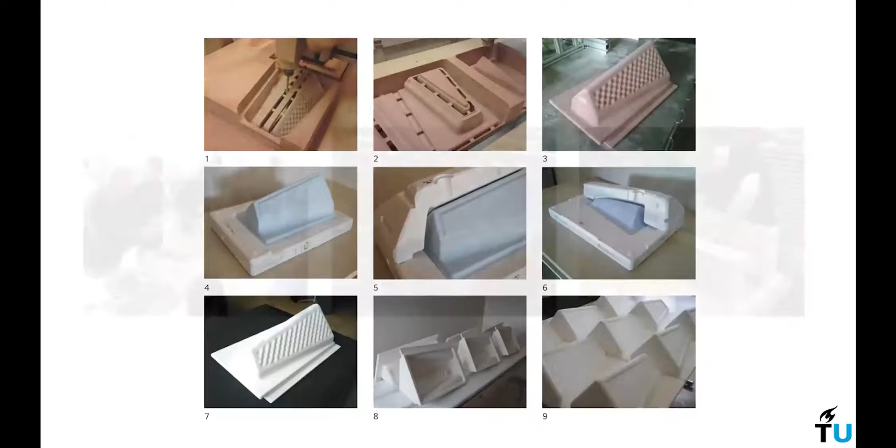One thing that really helped with the numerical work was having a company to work with. So I worked with Boston Valley Terracotta to help create a series of prototypes. They have a workshop every year for advanced ceramics, and every year we come with a new design and build a new tile. We did this four years in a row.

What you see on the right is the inside tile radiating, and the surface in the front and center, and then me working with a team of folks trying to assemble these tiles together so that we could test them.

This is the second year where we decided to move to an extruded design because it was a much more efficient way to build. In this case, instead of fluid moving through the ceramic, because really ceramics are meant to keep water out, not keep water in, as it turns out at the building scale, it was much easier to embed pipes.

So we have the heat transfer pipes now embedded directly into the ceramic. On the right side is the inside radiator tile, so it's a ceramic radiator. And the outside is the collecting surface.

And those fluids move back and forth through a secondary system, so the fluid doesn't go direct. It heats a separate fluid in a tank, and that heats the other side. So the transfer of energy is clear, but the fluid does not actually exchange.

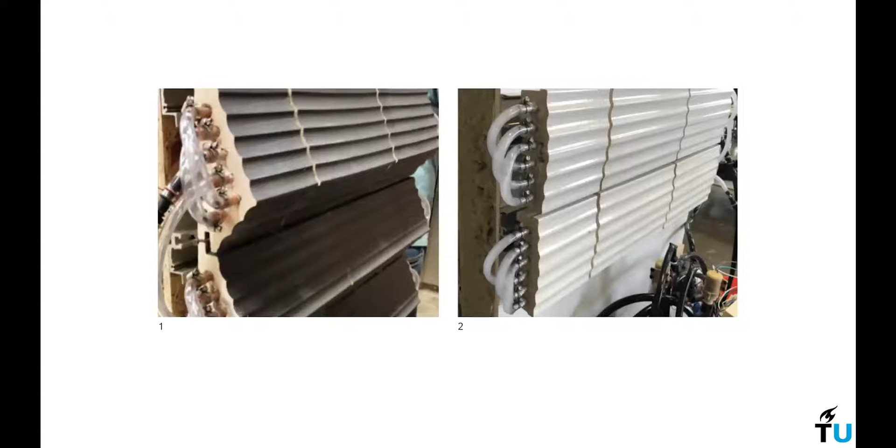Ultimately it looks like this in a wall section. You can imagine this is the spandrel panel of a building. On the left is the outside, on the right is the inside, where you see the storage tank, the pumps, and the radiator.

So how does it perform? We built it and tested it to make sure it worked. We put a heat lamp on one side, and on the other side you can feel the heat.

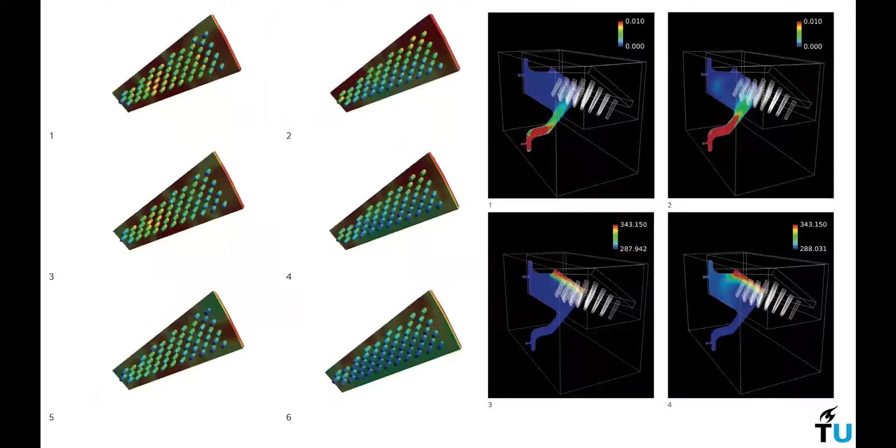So we know it works, but how much does it really work? We modeled it using fluid dynamics to get the right pin sizes, how many pins you need, and what pattern and shape.

We built a hot box — this is a standardized ASTM hot box test. You see a chamber on the left and one on the right. The right is the outside temperature, the left is the inside temperature. We deployed 64 thermocouples throughout the space and on all the components, ran the fluid through the system, and charted the results.

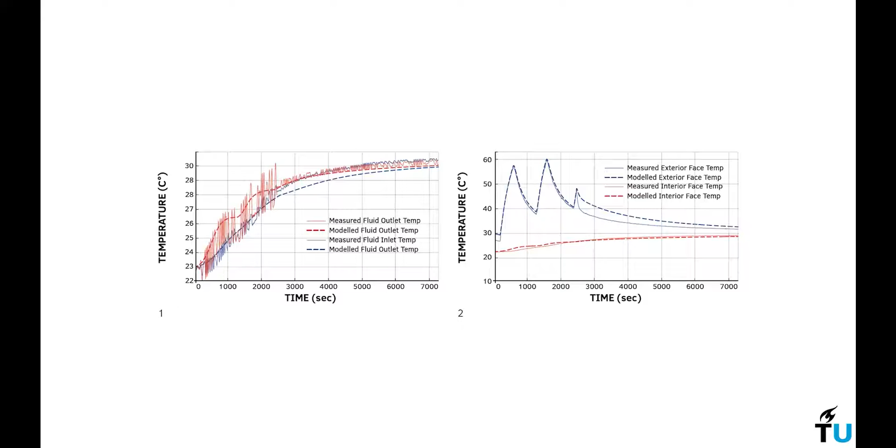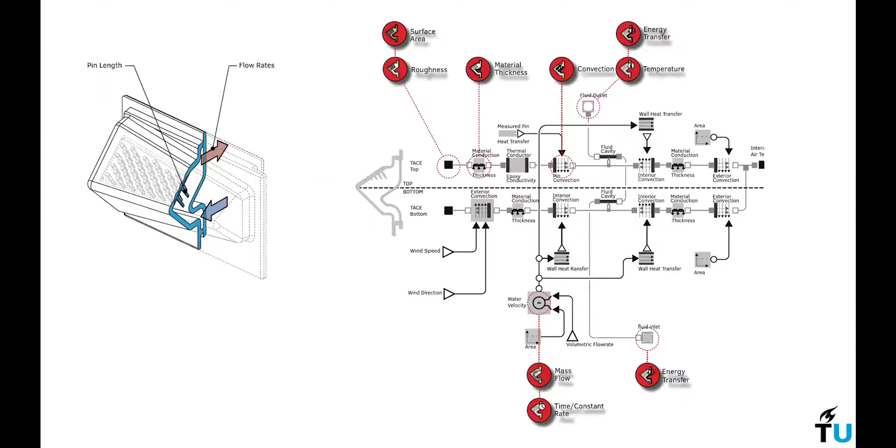This is modeling the first version, which became the baseline — not the second version I showed. We looked at when there was no flow, when the flow increased, all the way to significant flow, and the different levels of pins. We tried pins with glue, pins without glue, a whole selection of assembly methods, so we could understand how to calculate performance for any other design we came up with.

So when I'm thinking about ceramics, I'm thinking about the computational model. The ceramic ultimately is what the building finds — it's what's left over, what we arrive at. The ceramic is not what we start with, but what you arrive at.

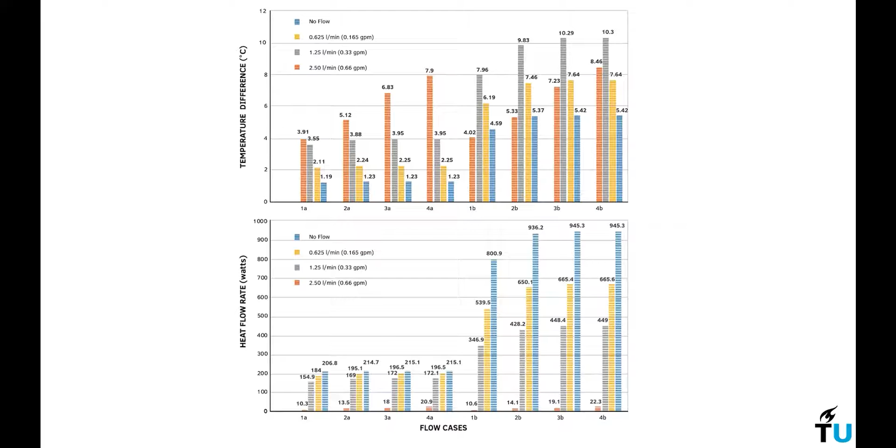To test this out, we picked a building — Stevens Institute on the Hudson, which desperately needs a new facade. It goes back to the era of concrete block behind stone with single pane monolithic glass and no thermal buffer in the mullions. It's a very poorly performing facade, indicative of many facades from the 1950s found around the world that are currently failing and in need of replacement.

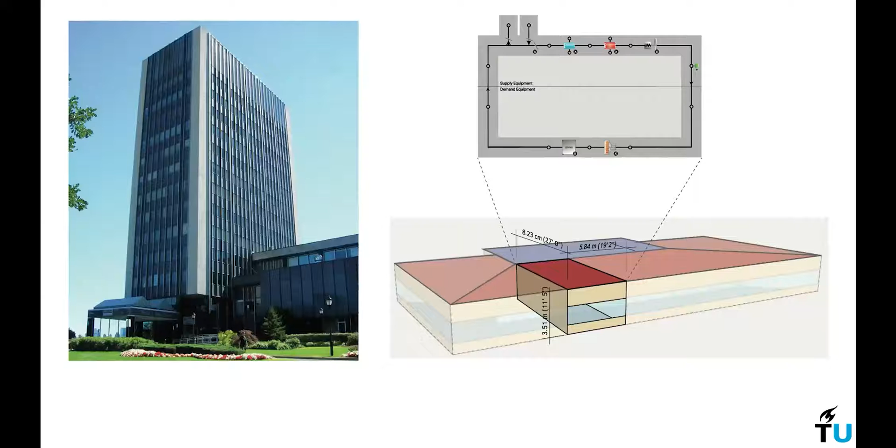The idea was to replace this with the new system. So here is the baseline — you start by modeling it, including a system you might use with the building. Originally the idea was to capture that energy, use it through heat exchangers and storage, then put it into a 2 or 4 pipe system already in the building. I'll talk in a minute about why that doesn't work. The spandrel panel is the target area for the system replacement.

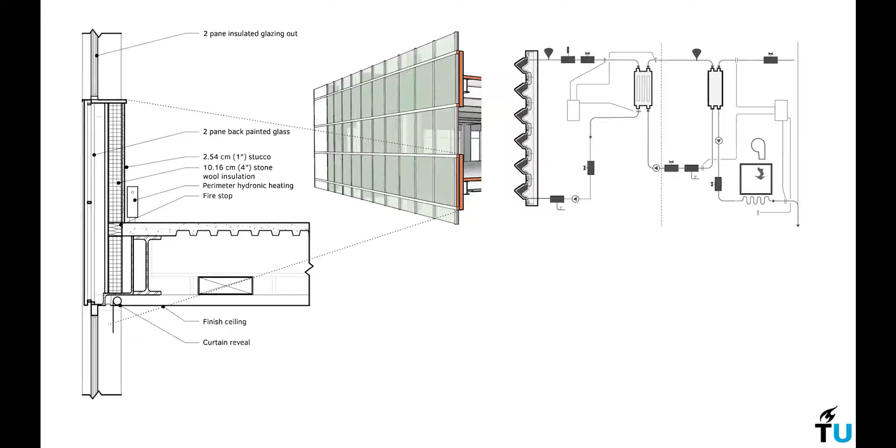We wanted to benchmark that against an ASHRAE designed curtain wall — as you'd normally ask, what do we have to upgrade it to in order to perform today? That would be this design, the standardized and accepted way from ASHRAE to represent a performance facade. It would work a bit differently because you'd add new mechanical systems, upgraded from the original one.

And then the system that I'm working on - this is deployed, the first unit designed in the spandrel panel. In this case, we thought from the temperature we would get a lot of energy, and there's a lot of energy there. We put that energy right into the system.

The problem is modern mechanical systems are meant to use things that have been on fire. They're at a much higher grade energy - either much colder or much hotter. A lot of energy is put into the mechanical system to make it very hot or very cold to distribute. Therefore, ambient temperatures you can collect in and around the building are not sufficiently able to connect into that system and make a difference.

So in the end, we realized we had to decouple the system completely and say there are two mechanical systems in the building now. There's one on the building facade that deals with the bay, and there's one on the core. That's more traditional. The goal is how much smaller can you make the inside system to save cost over time and make the building perform better by taking advantage of what's already there.

So here, modeling the same way, this is annualized - power per area at an inlet temperature of 22 Celsius versus power per area at ground temperature, because we're not sure where we should start with the temperature of the water when we look annualized. So we took two points, and you can kind of see the difference between the starting temperature does begin to make a difference.

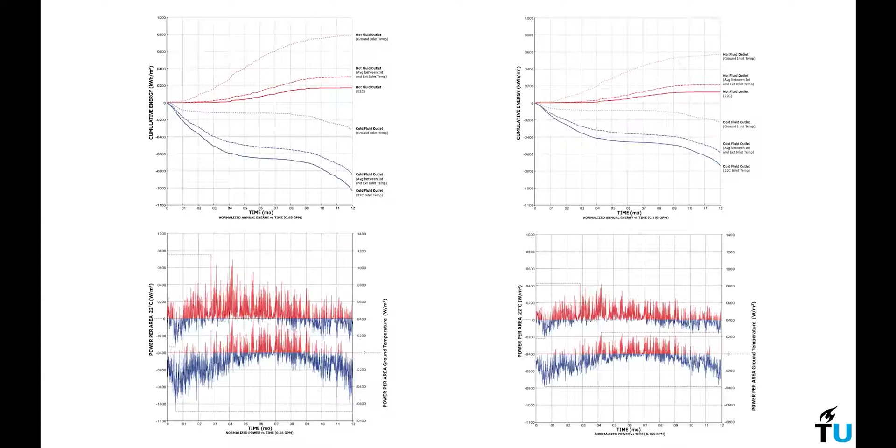And then we're looking at cumulative energy over time, over the year, on the top graphs - how much coolth do you create, and how much heat can you create from the energy extracted and given with the system, modeled and then calibrated physically.

And so these are the findings of the first tile. There are significant improvements over the 1950s envelope, which is great - that's the column here that says savings, that's savings over existing. The savings over ASHRAE are less. Although from a heating perspective, even in this first iteration of design, it's still almost 17% savings in heating energy. That's not insignificant. In cooling, it's a little bit less, 4.4%.

Fans, it's less because now we're pumping fluid instead of air, which is much more efficient. But pump energy goes up, so it kind of offsets from the savings. And heat rejection is 4.5% - that's not nothing for a first chance. The point of the project, in total end uses, when you blend that together for a typical floor zone, is about 4.3%. So it's not a mistake, it's something.

And it's indicative that we should go further and continue to refine the design. So ultimately, if we're comparing now by the bay zone, we can improve that a little bit.

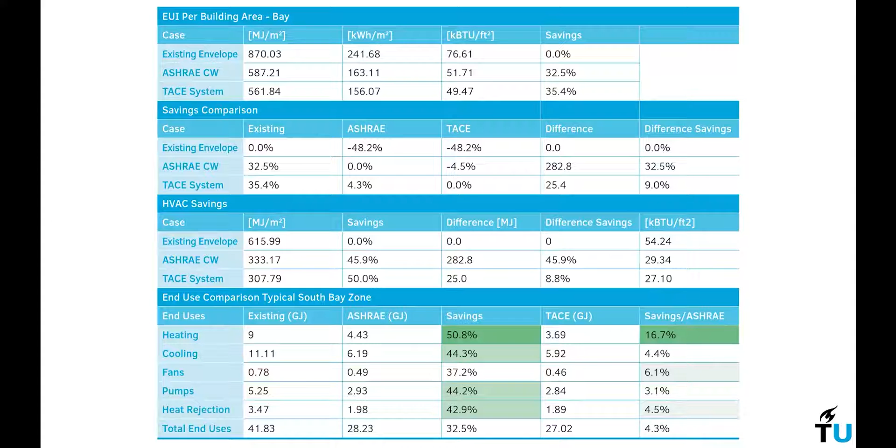And then I'll talk about some of the design iterations. In this case, we now design the mechanical system as separate in the model from the building mechanical system, and these are where the building physics components and variables we care about are arrayed in the model. Ultimately, that's why we changed manufacturing techniques - manufacturing the individual tile is significantly more intensive than it is to extrude tiles. So we moved towards an extruded model of tiles on the lower end because you can make significantly more of them much faster.

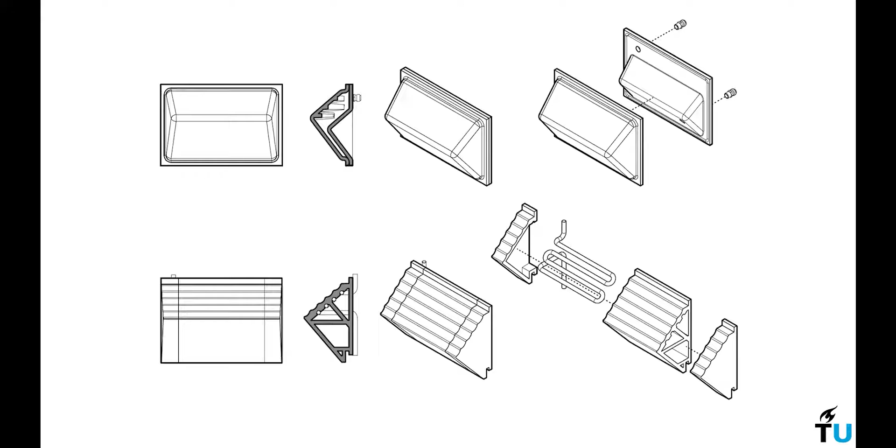And of course, at the end, it's the facade, so it's the brand of the building. And so we want to make sure it's not so restrictive that you wouldn't use it. It had to be flexible. So we built this into modules so that you could pre-assemble the system. It is a mechanical system, a facade appliance, that can be deployed in very straightforward ways.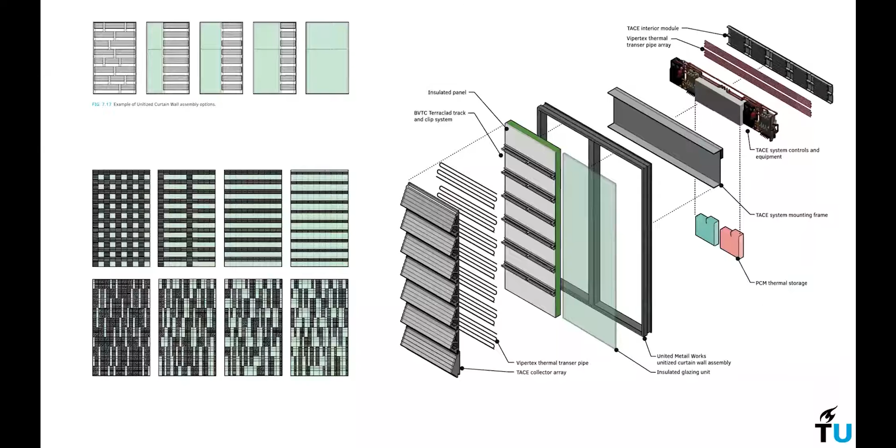You can see the middle column there, the individual 1.5 meter wide sections. At the bottom, you can get the same window wall ratio with significantly different patterns. So there's the ability to create and say something with the building while it performs. That was important to us. And you can see a bunch of varieties like this, how that might be deployed.

We also felt it could be improved even further by changing the design to do both a heating loop and a cooling loop, separated at the building envelope, which was the ultimate design. We believe we can increase that - in this case showing a heating improvement over ASHRAE of 27.5%, which is very significant. This is one we've designed, and at some point, if I get time, I will build it and test it. But there's a significant difference now showing that you can capture that energy, hold it in storage, and use it, creating that ceramic mechanical system at the envelope.

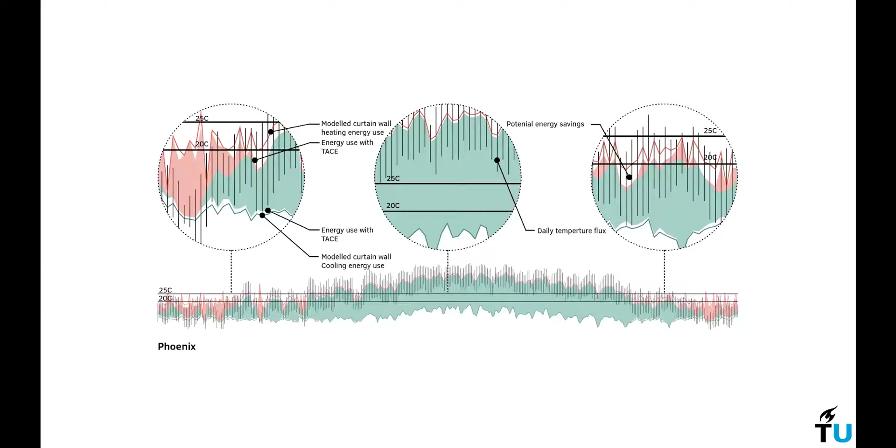So we wanted to test this and see how much gain or loss you could get in the different locations. Ultimately, I think this tells the story best: the shaded area is where we started, and the line area is where we ended up. That's the savings you get - that's the amount of camouflage you can get out of this system for the building.

And that's the final prototype. You can see the heat - we removed the tile and you can see the heat transfer pipe, still the radiator on the inside. That would be a model of one of those bays. And that's the final design - the tile on the left was the first one, actually that's the one we modeled. The one on the right is the improved version, which has a thermal break between the hot loop and the cold loop tile. That's the one we think is best.

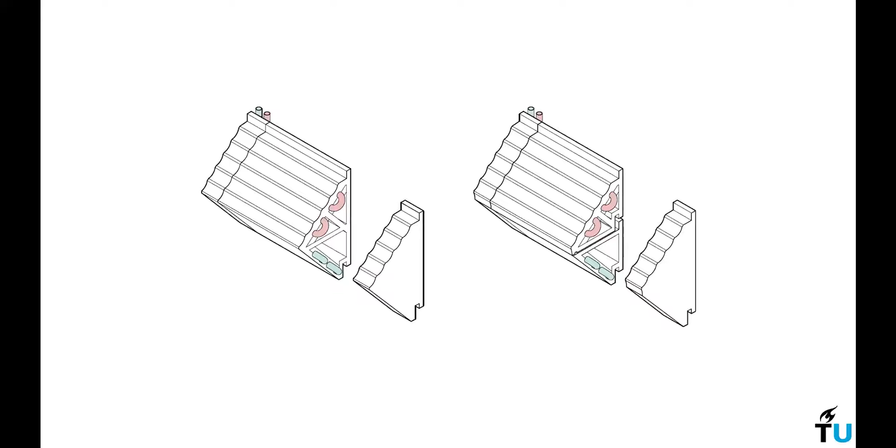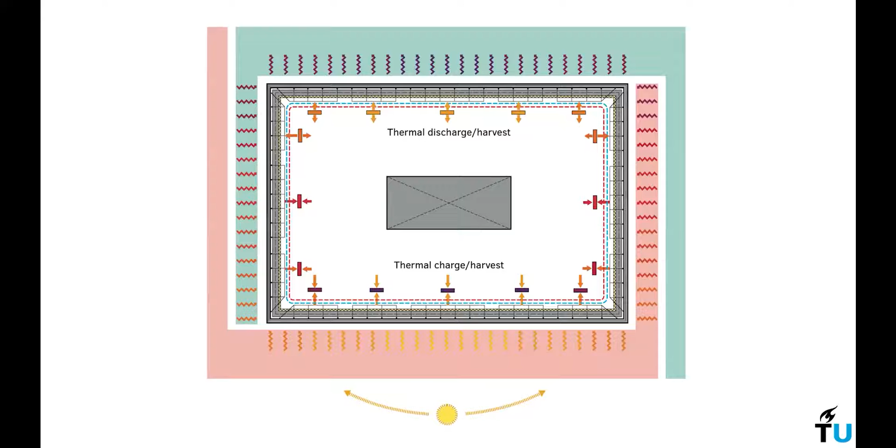That probably beats 27%, right? And why is it important to do that? Because buildings are often heating and cooling at the same time, so at the envelope you can't exchange through the same surface simultaneously. You have to understand that my zone on the east and my zone on the west might be quite different - one might be in heating and one might be in heat rejection. So that's now the new concept of climate camouflage.

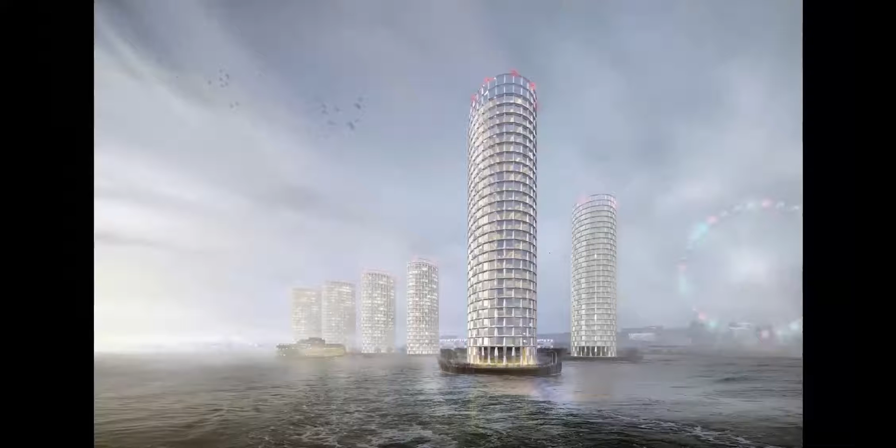So we did a competition a few years ago to try to put all of our thinking into how we would deploy and build a building in similar ways to both the idea of decarbonization through improvement of energy, as well as the articulating of fluid through the building envelope. So this is bringing it together - not ceramic, because it was a metals in construction competition, so we used metal. I guess I'm starting with the conclusion.

We looked for - you had to pick a site and build a tower. We decided to build multiple ones. This is Staten Island, often the forgotten borough in New York City, but it actually has one of the best views of New York City because it's unimpeded from the south side. And there's a ferry station there, a pretty wonderful ride you can take back and forth. So we were looking for land we could maximize, and we built the buildings in between the ferry slips.

In this case, we looked at taking fluid from the bay in a fluid exchange, bringing it up into a steel facade with a heat exchanger and running that fluid around the outside of the building in multiple fluid loops, not dissimilar to the way we showed the ceramic, but here you're heating and cooling metal surfaces on the inside and outside, as the primary structure here is also the major heating and cooling engine.

We optimized that structure for gravity, but also for views and shading. So in this case, you see the material mass and structural stability evolve: it starts with stick framing, moves to flat sheet, to folded sheet, to folded sheet plus tabs, and ultimately folded sheet plus stiffeners. We worked with our structural engineering team and did the analysis to show we could build a building like this with this pattern.

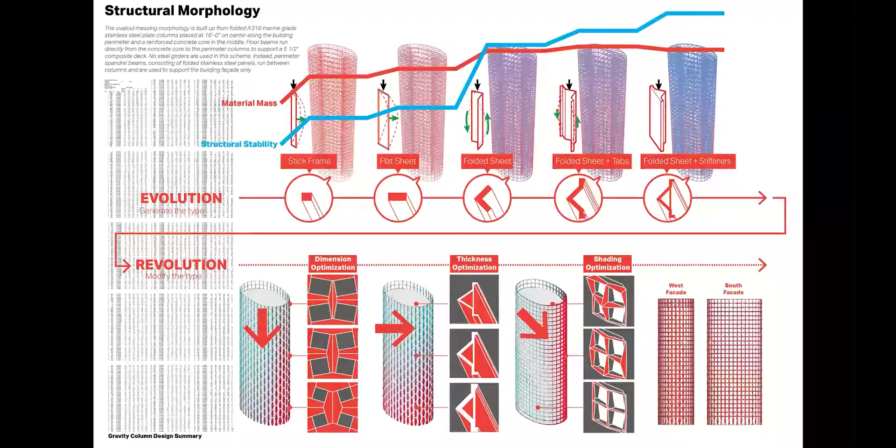This is showing how we would engage with the bay. I don't know if it's important, but there's a rule that you cannot change the water temperature around your building more than 5 degrees. So that heat exchange has to be done with enough surface area that you only have a 5-degree difference when you're using it. There are a few buildings in New York that bring bay water into their building for heating and cooling rejection, and this was taking that same idea and bringing it into the building facade rather than the mechanical room, where the outside of the building becomes the mechanical system.

Working with Tishman, and understanding why we're a multidisciplinary company, brings us back to the beginning of the story of why I'm at AECOM - it has all the different disciplines under one roof. So I can talk to my mechanical engineer, my structural engineer, my contractor and fabricator, and have them all help us create something that has never been done before.

At first they'll say, you can't do that. And I'll say, are you sure? And they'll go, well, I don't know, maybe I'll do it like this. You just have to get them engaged in the conversation. Then all of a sudden they're like, we're going to bring a barge in and bake these in pieces, and they take ownership of the component. That's really exciting to see - it happens when you give them a challenge of something they haven't done before.

I'm very used to that because I hate doing things I've already done before, so I always like to take on a new challenge. People are often very comfortable doing something they've done before, but when you give them the opportunity to see what it's like to go on that journey, they really want to go with you. That's a big part of being the integrator in that dynamic from a behavioral perspective - getting people focused around doing something new, like they did at the Jet Propulsion Laboratory and NASA.

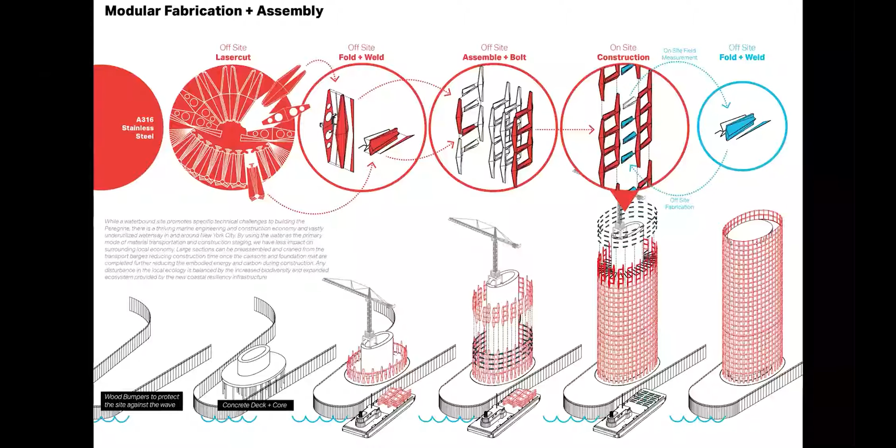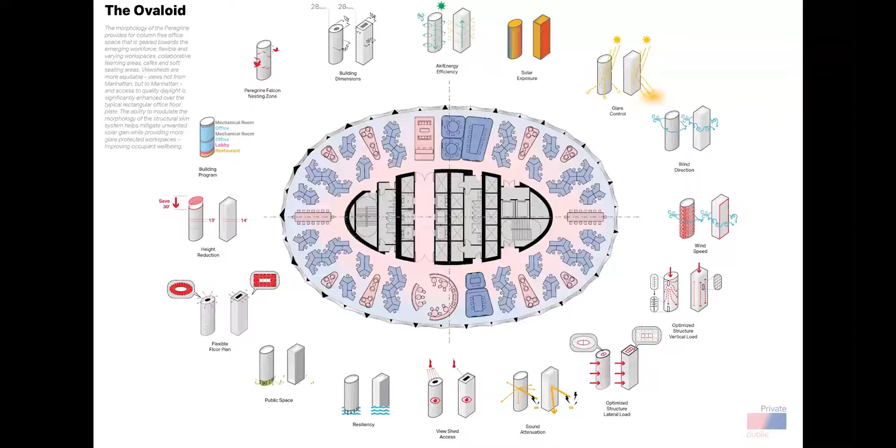This is an ovaloid, a particular shape, ultimately because it's more efficient from an energy perspective - better views, easier to heat and cool than the same system with a box, and much lower carbon. So here we're tracking the material weight, the embodied energy, embodied carbon, maintenance cost, and operating energy use, and you can see significant savings over the square building with the ovaloid.

So it's not an ovaloid because we like ovaloids, it's an ovaloid because it performs. It may not perform the same way in other locations - it should be a different shape there. But here, the shape is determined by the performance, and that performance is both qualitative and quantitative.

So the Forgotten Borough, behold Staten Island. There are 2 commercial buildings and 3 residential buildings we proposed to be in between the ferry slips along a park they've been developing. There's a mall there before the city.

What's interesting is that slowly over the years New York has already become full - Manhattan's full, Brooklyn has slowly become filled with tall buildings, New Jersey's become filled with tall buildings. This is the last spot in front of New York City that has no tall buildings yet. So we know it's coming.

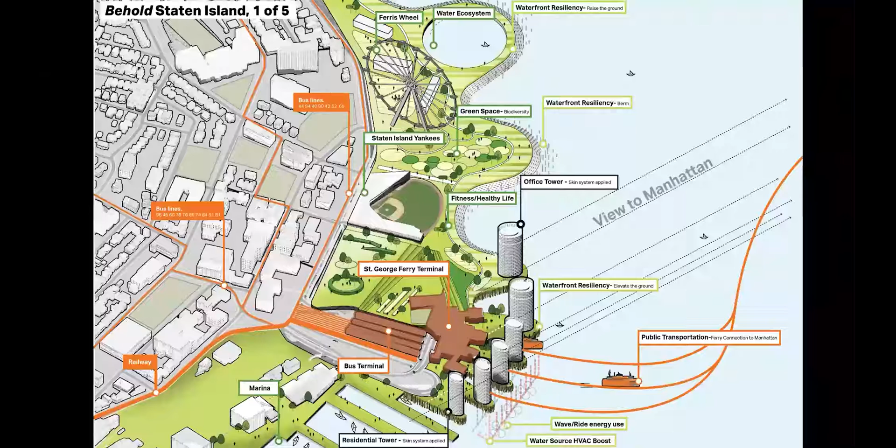And this is really the last slide, and how we envisage being in and around a space, in and around a space like this.

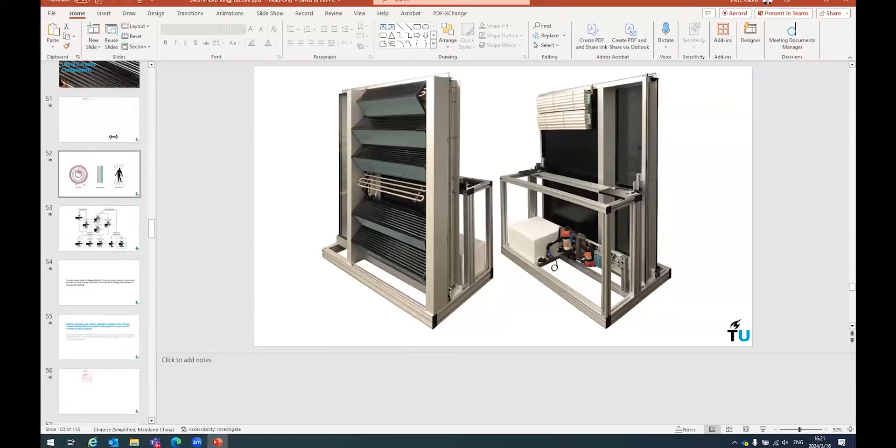And you talk about Delta. Which one? This goes back a lot, right? Annual temperature, the climate tape. The original one, or the last one? No, I think the very first one, they jump into the research section. Go all the way up. Oh, not that far. This one. No, not that one. You meant the one down here at the end?